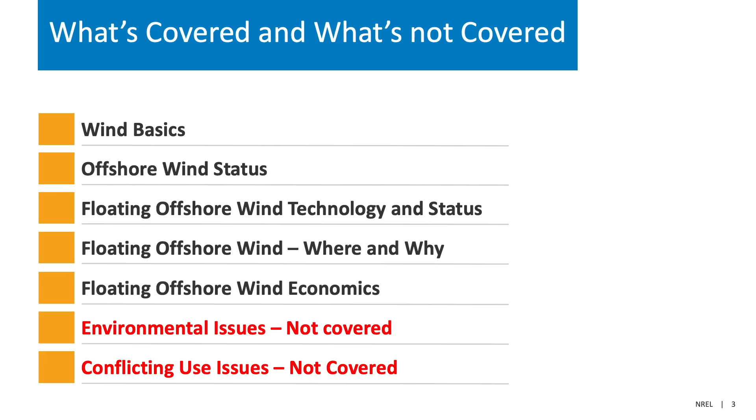I want to make sure everybody understands that I'm trying to speak to multiple audiences. I think the intent of this presentation is to reach people who may be familiar with wind power and possibly offshore wind, but maybe haven't seen much at all about floating wind. But if you're new to the field, there's some introductory material that I'm going to cover. And if you're new to the field of wind, there's a little bit of that, but I can't promise that some of the material might be passé. I skipped some of the introductory material just for the sake of time. But I'm considering this an overview of the new technology of floating, and we'll get right into it.

I just put my bio in there. I won't cover that. Tiffany did a great job just now, but if you want to go back to this, it'll be there. I've been working with floating concepts since I started the offshore wind program, but it's really just starting to take off now.

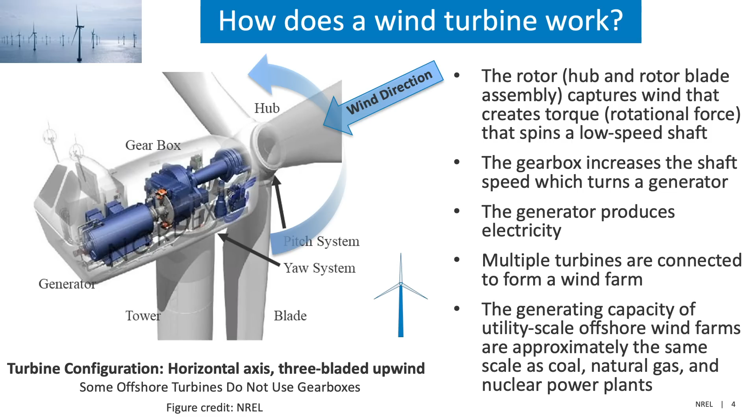I want to add, though, that offshore wind turbines sometimes have eliminated the gearbox. That's to reduce the part count. So you'll hear or see turbines that are called direct drive machines or direct drive generators. That means the low-speed shaft connects directly to the generator without a gearbox. Those require a lot of technology in the drivetrain system, but they're now becoming one of the main configurations used in offshore wind.

The first project in the United States was the 30 megawatt Block Island wind farm, shown in this figure. It's comprised of five 6 megawatt turbines that were originally Alstom machines, now called GE Haliade turbines, 6 megawatts each. It was installed in 2016 off of Block Island. To this date, this is the only offshore wind farm in the United States.

The wind plant is shown in the picture, especially the one to the right, in relationship to where it is in Block Island. These turbines can provide enough power for up to 16,000 homes in Rhode Island. But if you look at the island of Block Island, there aren't 16,000 homes there, so most of this power is used on the mainland. When they built this wind farm, a cable was brought to the mainland shore of Rhode Island, coming ashore at Narragansett, and it powers the homes in that region.

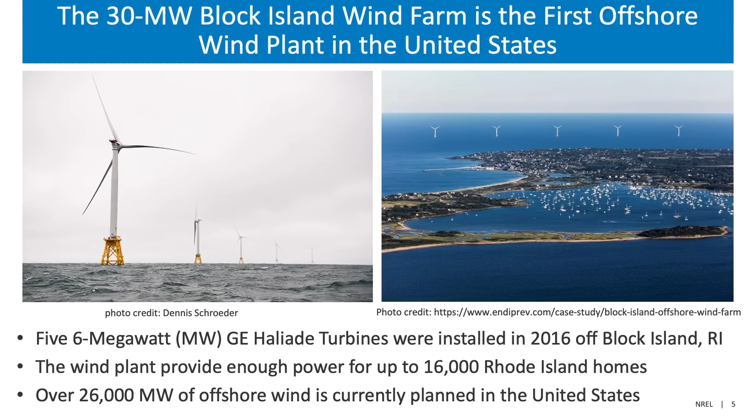So this is a very small wind farm. It was the first one, and it's still operating, of course. But there's now over 26,000 megawatts of offshore wind currently planned in the United States. This includes, depending on how you look at it, the regulatory lens through the leasing system, or the policy lens, where states have committed specifically to build offshore wind power in their region. A lot of this is happening on the East Coast, but it's starting to spread into other areas where we might see floating wind, and this is a floating wind presentation, which I'll get to in just a minute.

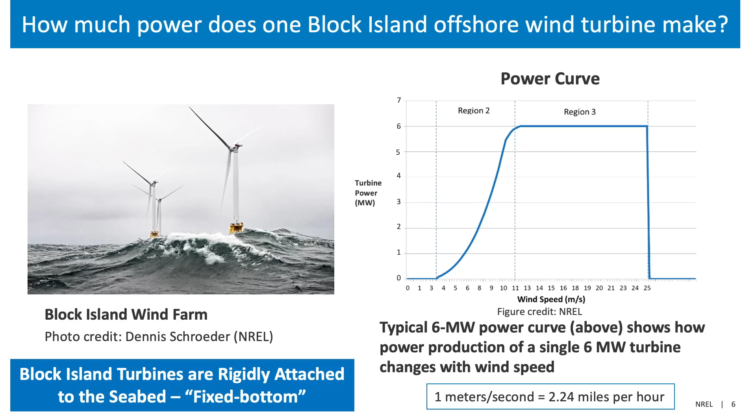The fixed bottom machines that we use are a lot the same as land-based machines actually, but they're bigger and have much more complex support structures that have to be installed out in the ocean. They're designed to withstand the harsh conditions of the marine environment, like corrosion, and they have to be maintained in that environment as well.

The floating turbines look similar, but the big difference is that they're supported from the bottom by buoyant substructures. Those are moored to the seabed, so they're floating, but they're moored through cables and lines that connect to anchor systems.

Before I move on, I want to clear up a couple things about terminology because people get confused when I refer to the support structures, which some people call the foundations. The substructure is actually a part of the support structure, the part that the platform is attached to. The support structure includes the platform, as well as all the mooring lines and the anchor system. Some people might call that the foundation, but the foundation is really just the part that attaches it to the ground. Hopefully that terminology will help as we go forward, but I'm using the terminology that the engineers use to design these.

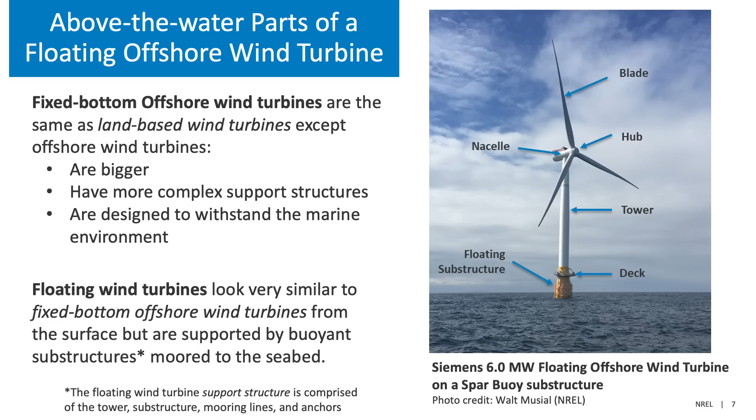So when we're talking about the platform itself, it's the substructure, and the whole thing is called the support structure, which includes the tower, by the way.

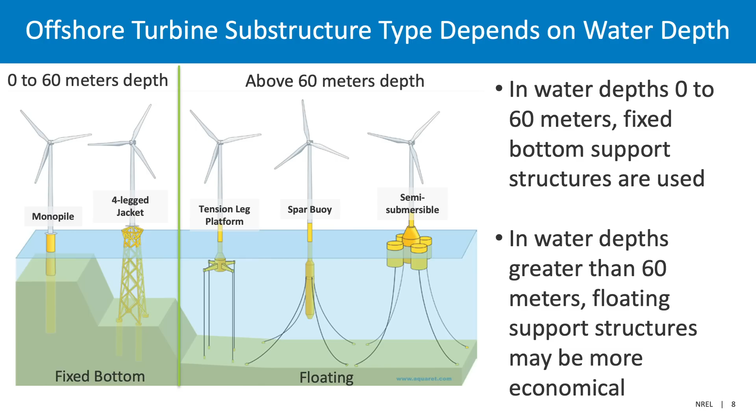Below the waterline, these are artistic views of different types of foundations, different types of substructures. There's the monopile, which is the most common, and then there's the four-legged jacket, which is the kind of substructure that you saw in the Rhode Island, Block Island pictures. And then beyond that are these floating systems, which I'm going to spend more time talking about in just a minute.

Looking at this same picture on the right, if you just stick to the fixed bottom systems, there's 27,000 megawatts installed globally in the fixed bottom type. Of the floating type, there's only 82 megawatts, so 0.3% of the total installed capacity is floating. We're just getting started, people. That's what this slide is really telling you, and we're excited about the floating industry.

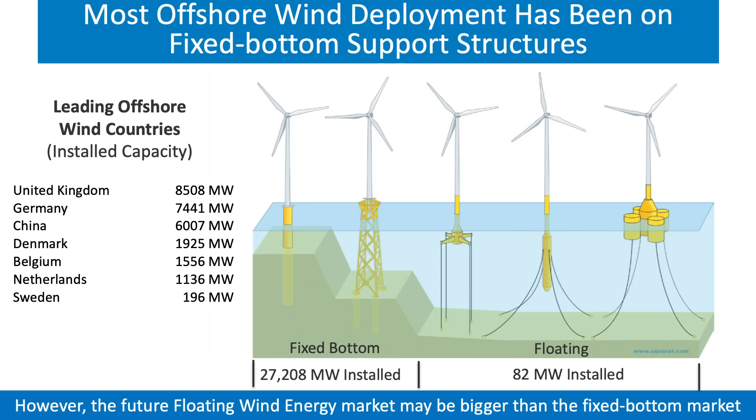The established fixed bottom industry is already going, and I included a few of the leading countries that have installed over a certain number of megawatts. These are the top 7 countries in the world that have installed capacity of offshore wind, but this is all fixed bottom technology. For floating, we're just getting started.

So why are we excited about this? It's because 80% of the offshore wind resources in the world that could be feasibly developed are greater than 60 meters, which points to this technology. If we use floating technology, we'll be enabling sites that are further from shore, more out of sight than the fixed bottom systems, and they tend to have better winds. So the economics and the feasibility of floating is in our favor in a lot of these areas.

We're already starting. We already have 82 megawatts installed, but a lot of that is just starting to accelerate right now. We expect that we'll see floating technology at the utility scale, and by that I mean 600 megawatts to 1,000 megawatts per project by the year 2024. That's only 4 or 5 years away.

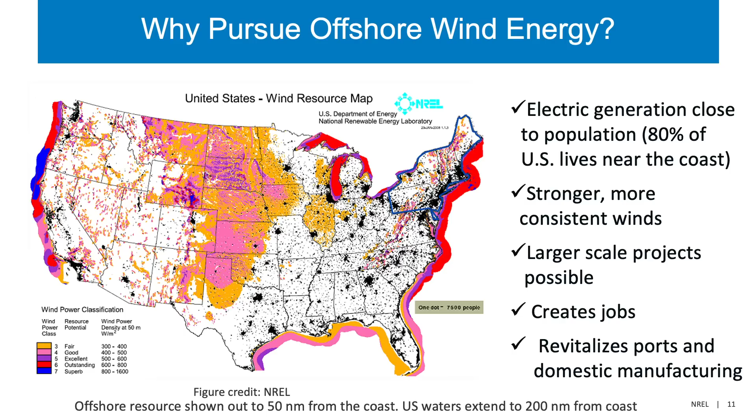By developing this industry, we're going to create a lot of jobs, and I have some targets on that at the end. It's already revitalizing a lot of the port and coastal manufacturing supply chains that were dormant from the loss of some of the shipping industry and other things that have happened over the years. But some of those facilities do exist, and we'll be upgrading them.

Now, you've got another resource map. This is the one we actually use, and it's based on wind speed. The darker red colors represent the higher wind speeds. The best sites are obviously where the wind speeds are the strongest, but also where the water is not too deep. So even with floating wind, we don't want to exceed certain depth limits, or at least we're basing our resource assessments on a certain depth limit. And we've set these technology filters to do that.

So this map is only showing you wind resources in areas where the water depths are less than 1,000 meters deep, and where the wind speeds are greater than 7 meters per second in velocity. There's a few conversions there in case you like to speak in miles per hour or knots: 7 meters per second is 15.7 miles per hour and 13.6 knots.

So given these assumptions, the U.S. wind potential is approximately 2 times greater than the U.S. electric energy use. So there's a lot of resource there, and offshore wind can contribute a lot to our total generation portfolio. Of course, it's not the only thing we'll rely on, but especially in coastal communities, we can use it to supplement renewable power.

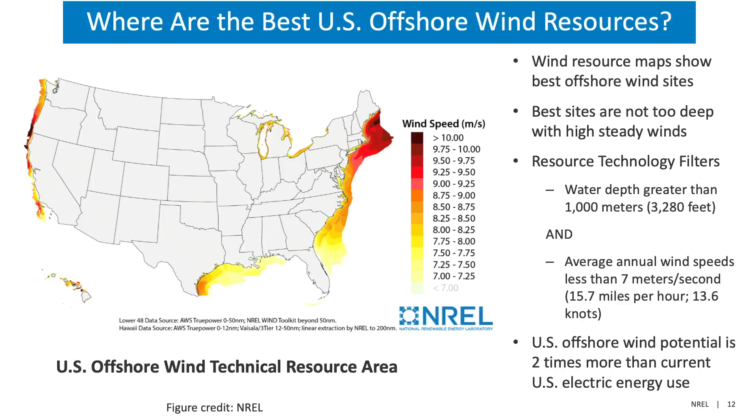I don't have a lot on regulatory, but I do want to show what's happening, and most of this is in the fixed bottom industry. These are maps that cover the regulatory activity in the United States, and most people in the U.S. might recognize that I've sliced out the East Coast, the West Coast, and Hawaii here. There's very active leasing going on through the Bureau of Ocean Energy Management, which has regulatory authority over the outer continental shelf, which extends from 3 nautical miles to 200 nautical miles.

And over the last approximately 8 years, they have granted 15 lease areas in the United States, which gives the developers who own them exclusive site control of up to 25 gigawatts of development capacity. That's what we typically refer to as the regulatory pipeline. We also have the policy pipeline, which is about the same, maybe a little bit more now.

BOEM has also identified 13 call areas. A call area is a potential wind energy area that's under public review. It might become a wind energy area, or it might not, or it might change in scope or dimensions. We don't know yet, but we haven't counted the call areas in the regulatory pipeline up to this date. There's also another category, unsolicited projects, which are applications for additional projects that BOEM has received. For any reason, a developer can submit an application for a project, but it does still have to go through a regulatory process that includes some attention to whether there's competitive interest in that area.

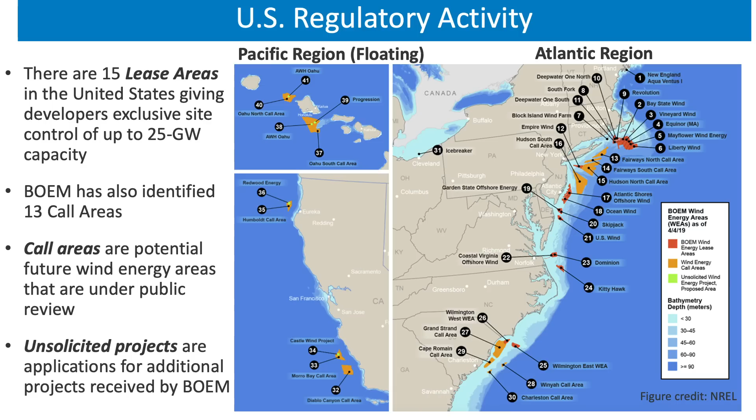I don't have a lot more on the regulatory side, but that's something maybe for another topic. So in the United States, we have areas where floating might be considered, and this map was drawn in a different way, based on our bathymetry. There are 2 colors here: a light kind of aqua color, and a dark blue. The light color indicates areas where our cost techno-economic models predict that fixed bottom technology will be superior.

The dark blue indicates areas where the models indicate that floating might be superior, and you can see there's many areas where floating technology might make more sense. Of course these boundaries can change as technology changes, but you can see that if you get north of Boston, north of Massachusetts, the shallow water goes away. If you're on the West Coast, there's virtually no shallow water unless it's really close to shore. And in Hawaii, I'd say the same thing.

The Great Lakes might stand out as having no deep water, but that's not the case. When we did the resource assessment, we eliminated all the deep water because at the time, deep water was considered unfeasible for the technology in the Great Lakes, since ice flows and freeze overs in the winter could potentially prevent the current technology from being successful year round. There's been a lot of talk about reassessing that position, and the technology for deep water in those conditions is considered possible by many people.

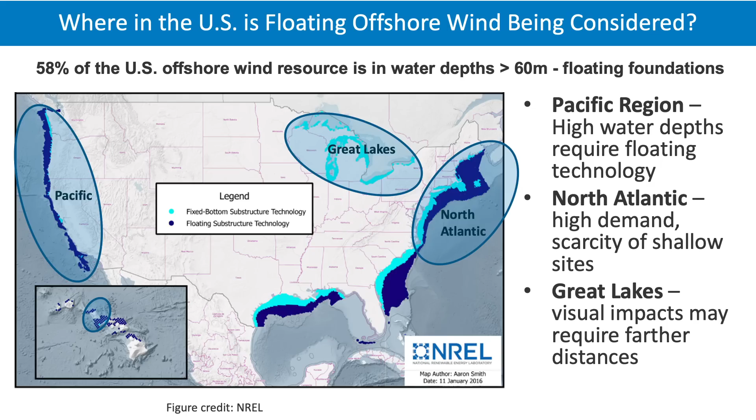There's likely to be a push toward floating because visual impacts may require further distances, especially in populated areas. So those are the areas we're looking at. There's certainly arguments for the South Atlantic and the Gulf of Mexico, but both of those regions have lots of shallow water.

From the technology standpoint, we're leaning heavily on the oil and gas experience that helped accelerate the first generation of floating wind turbine prototypes. We're past that point now and moving toward a pilot stage. The basic substructures that were used were derived from the oil and gas industry, but we're finding that the criteria we use to design an oil rig, if used alone, can result in safe and successful designs, but they can be bulky and expensive.

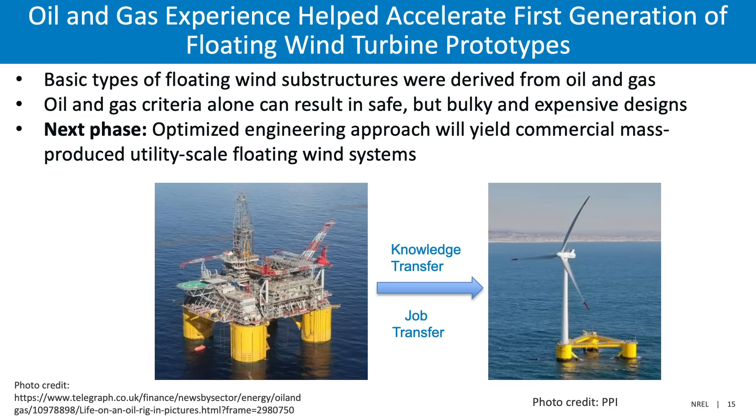So the next phase is likely to be an optimized engineering approach, which could yield commercial mass-produced utility scale systems. We're seeing that right now, and there's a lot of knowledge transfer and job transfer coming in from the oil industry. You'll see that the oil industry is heavily involved in the early phases of the offshore industry, because a lot of those skills transfer directly.

So the characteristics of the basic floating platform types are as follows. You can see this illustration of three different types. They relate to three platform types that get their static stability through different methods. One is a spar, which has a deep draft but achieves its stability through ballast weights installed very low. The semi-submersible is a low draft system with a wide footprint on the water plane where it distributes its buoyancy, and this is challenged by high exposures to waves and structure above the waterline, because a lot of the steel has to be right at the waterline.

For a tension leg platform, shown on the far right, it achieves static stability through mooring line tension, with a submerged buoyancy tank. These can be the lightest weight systems, but the problem is they're unstable until you hook up the mooring lines. They also have very high vertical load mooring line capacity - the anchors have to pull up at about 10 times the force of the spars or the semi-submersibles.

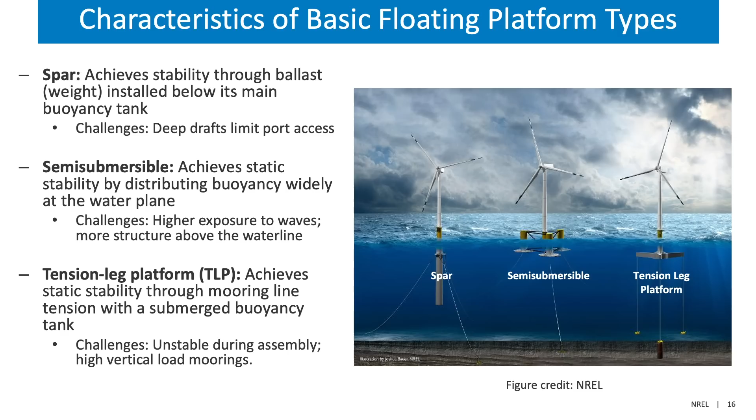So they all have challenges, and we're finding that as the industry evolves and works toward optimization, these challenges can be mitigated by hybrids of the various systems, and we're seeing that.

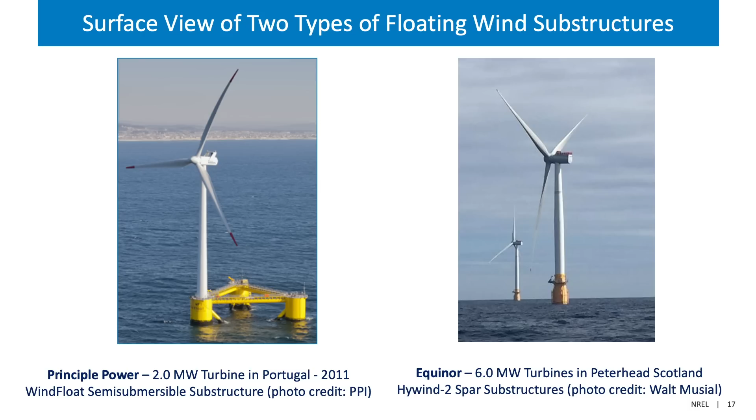From a surface view, there are two types of platforms shown here - one's a semi-submersible and one's the spar - shown just so you can visualize what they look like from the top. You can tell the semi-submersible because you can see the structure. With the spar, not so much.

So if you look at this illustration, it shows some of the other pieces now. I'm going to focus on the non-turbine equipment. We already talked about floating substructures, and the dynamic array cables connecting the turbines create a lot of the infrastructure and cost of the system.

Then there's the mooring and anchor systems that connect the platforms to the bottom, and the installation assembly, which isn't shown in the drawing, but this is the equipment that has to be deployed to install all these, both in the harbors and out at sea. Then there's the substations, both offshore and onshore, the export cable that connects between them, and costs associated with decommissioning that happens 25 to 30 years after they're installed, since that's their expected design life.

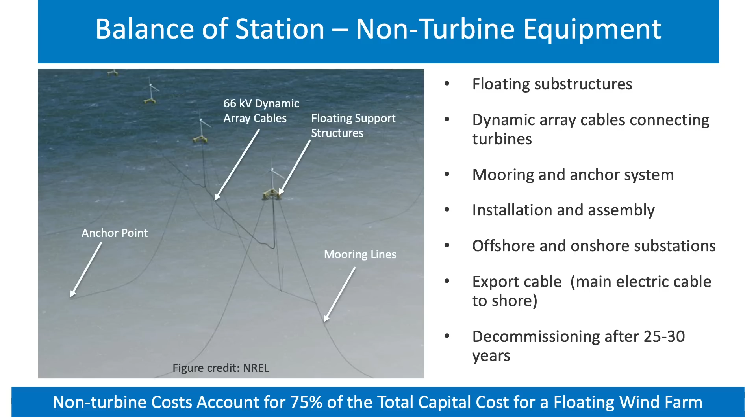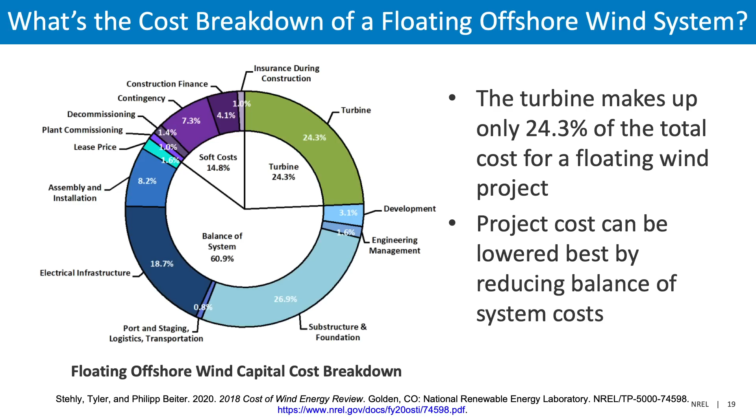So about 75% of that capital cost goes into the non-turbine cost. This figure shows the breakdown of how those capital costs are distributed, and you can see only about 25% of the cost goes to the turbine. The rest is made up of the substructure, electric infrastructure, assembly and installation, insurance, and so on. Focusing on that bigger part of the pie is the best way to lower the system or project cost if we're looking ahead to reduce costs.

So I'm going to go through some parts of the wind farm we already talked about, for a better technical understanding. The first is the mooring line and anchor configuration systems. There are several different types of anchors, and I've only shown the drag and embedment anchors here, but these mooring lines come down from the system and connect to the seabed.

This is shown at a fairly high depth, showing a kind of hybrid mooring line where you have synthetic mooring line at the top, which doesn't have much weight to it, and a chain mooring, which is how a lot of these platforms stabilize, because they use the weight of the chain mooring to draw the system down and stabilize it. This is one configuration, but it's an example of how it might look.

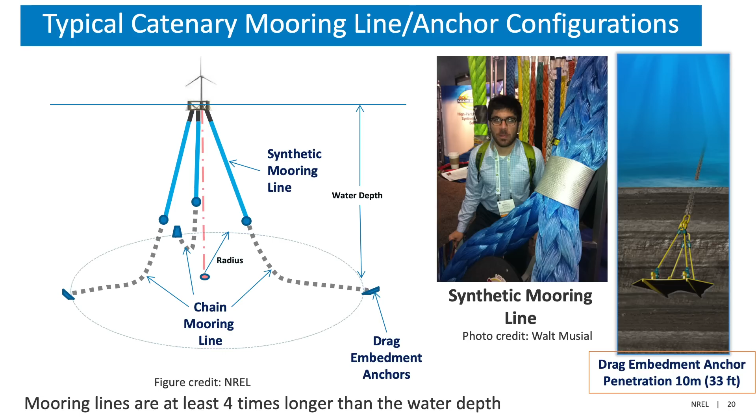For those wondering what those lines look like, I put in my colleague Marco standing next to a synthetic mooring line, and you can see how big the diameter is. They're huge lines, and this is how we keep the platform from moving around.

Now, if we go to the electrical side, these are additional cables that carry the electricity. All of these dots represent turbines. They're connected together, and they all aggregate at a substation. From that substation, an export cable brings the power to an onshore substation through fairly high capacity subsea cables. The array cables are smaller, but still big, with voltages of 66 kilovolts.

This is a new innovation that allows us to lower the cost of the wind plants. The electric cable costs increase as turbine spacing increases and decrease with turbine size, because with fewer or larger turbines, you need to connect fewer turbines, and the cable costs go down. But the exact spacing of these turbines is really a trade-off between wake losses that happen between the turbines and array cable costs. The larger the spacing, the more cable you need and the more expensive it gets, but you have less energy losses.

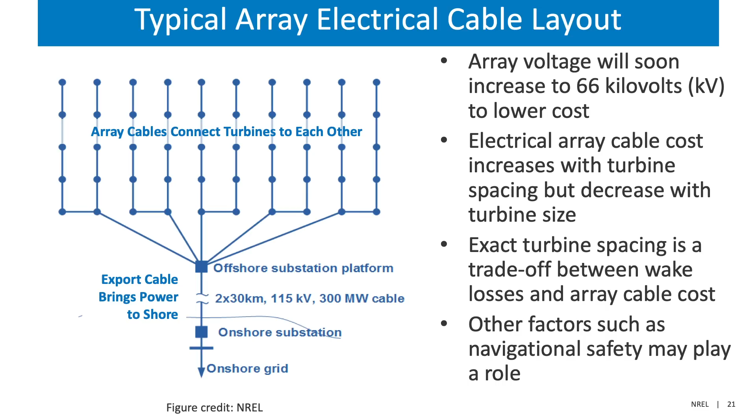Other factors could also play a role, such as navigational safety, which has been brought up in some negotiations earlier among projects going in on the East Coast. This is something that needs to be discussed, but it's not really part of this discussion here.

I do want to touch on how turbine spacing is determined and how it might change as projects get bigger. Turbine spacing is based on the rotor diameter, which is the diameter the blades sweep as they turn around. One rotor diameter on a big GE machine is 220 meters, but to create adequate spacing, the machines have to be somewhere between 6 and 8 diameters apart. I've seen projects as low as 4 diameters, maybe up to 10, but typically in between.

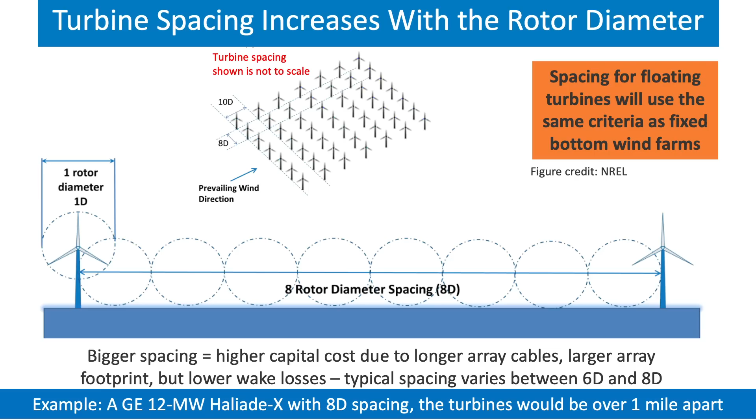I guess that's all I'll say about that, except for the fact that when we go from these fixed bottom arrays to floating, we're going to use the same criteria and the same physics results. There's some advantages we can talk about, but I'm probably not going to get to that today.

Another thing I want to talk about in this next slide is the watch circle. That's really accounting for the fact that these turbines can drift within their station, because the mooring lines have some slack, and as the wind blows, the upwind side becomes more taut and the downwind side becomes more slack, as shown in the figure, and they drift around in a circle. Well, how big will that circle be?

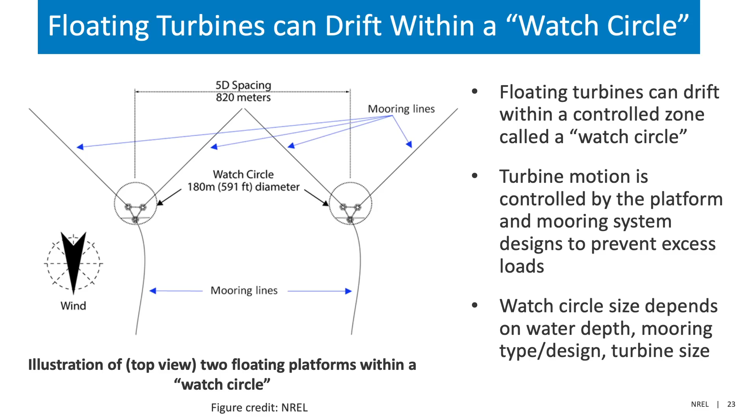It really depends on the design. It depends on how long the mooring lines are, the water depth, the design of the mooring system, and also the turbine size. So you can appreciate that the turbines aren't necessarily exactly fixed in space. They can move in actually 6 degrees of freedom as they're anchored to the sea bottom. That can affect some things, but generally the platform's job is to control that motion and make sure the turbines are protected from excessive wave action and things that might damage them or cause additional fatigue.

So all these turbines have dynamic array cables. That means the turbines and platforms are moving, and we have to protect that power cable from bending and breaking because of those motions. So there's all kinds of protection systems involved in the dynamic array cable to protect the static part of the power cable from seeing all those deflections and motions. They help isolate the cable from those platform motions.

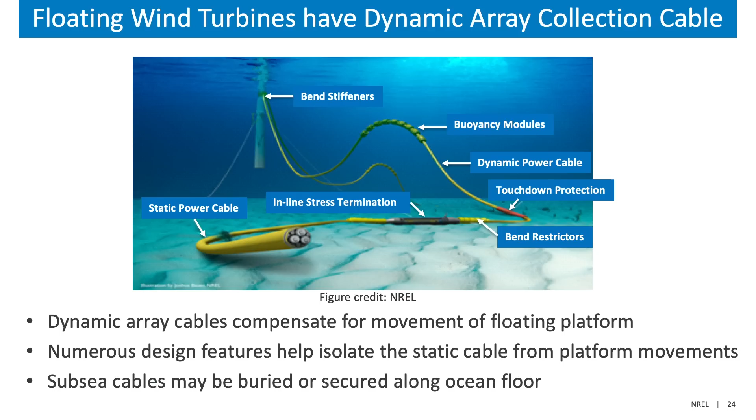And then those subsea cables can be buried, which they typically are for fixed bottom systems, or if it's really deep, they may just be secured with a mattressing system or some other means. And that's part of the design.

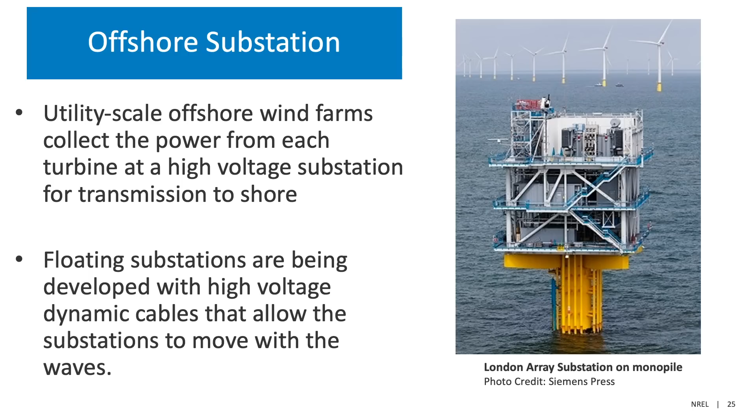They all connect to a substation. Now, I don't have a picture of a floating substation because I don't think there is one that has been built yet. But we're working on the same concept as this one. This is one from the London Array, and it's a fixed bottom substation, but chances are it will look very similar to this, except it will have dynamic array cables attached to it. These are under development right now.

A big part of floating and a big difference between floating offshore wind and fixed bottom offshore wind are the port and infrastructure requirements. We envision that floating systems will be mostly assembled and constructed at quayside or at a wharf facility, meaning a lot of the assembly and commissioning will happen there too. That's a good thing because it will avoid a lot of the labor at sea, which is very expensive and can be more dangerous than labor conducted in the harbor.

So we need wharf facilities that are adequate, and they need to probably be upgraded or built from existing ones. We need a navigation channel and wet storage that will allow the tow out of a system with the drafts being designed. And most of the platforms designed so far are semi-submersibles because they gravitate toward low draft systems that are easily towed out.

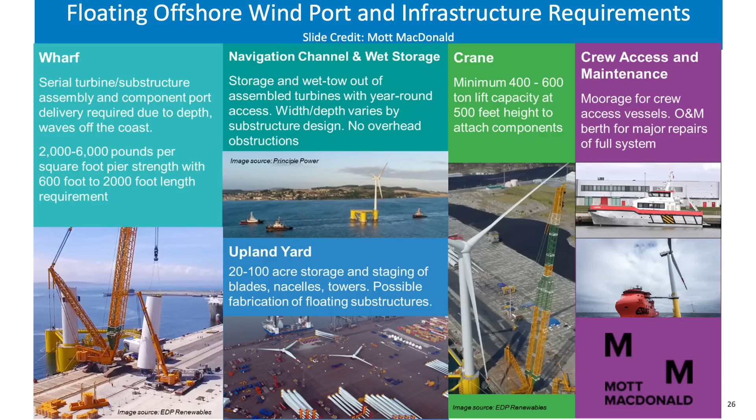We need an upland yard for laydown, storage and staging of the parts. We need cranes that have very high capacities, not just in how much they can lift, but how high they can go. And then the crews and access for maintenance don't have to be co-located in the manufacturing ports, and they don't have the same restrictions. A lot of these assembly ports need to have no overhead obstructions, such as bridges, so the whole assembly can be towed out in one piece.

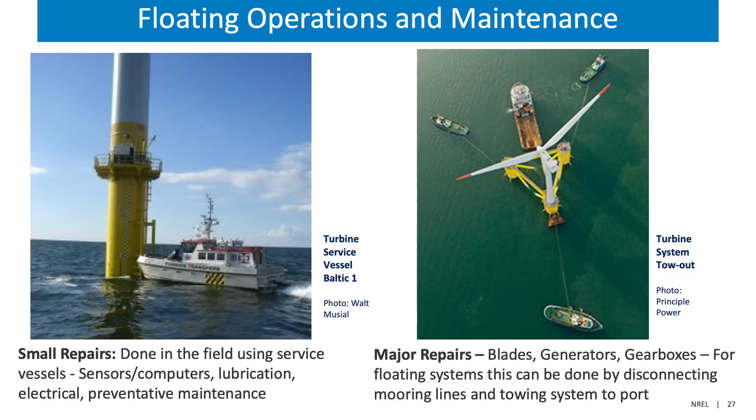So for floating operations and maintenance, there are two categories I've divided here. One is small repairs, where the turbine will be boarded directly by the maintenance crews through small ships. If it's a major repair, they can be disconnected from the mooring lines and towed into their construction or maintenance facility.

Most of these were very successful and produced the energy that they were expected to produce. But that phase is really over now, and we're really entering a pre-commercial phase, which began a while back.

There's about 14 projects totaling about 229 megawatts that are underway, already under construction, or have been approved, or are about to come online. That phase of pre-commercial installation is expected to be complete in the next 3 or 4 years.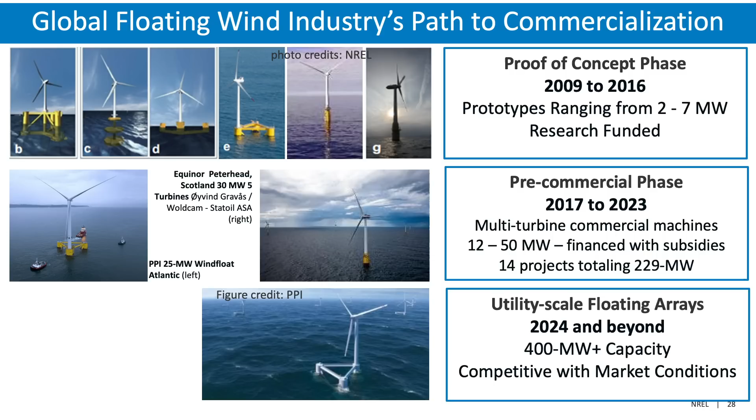Around 2024 is where we kind of see that happening. That's about the same time that we would expect competitive, cost competitive with market conditions. That's kind of the progression that's happening right now.

Leading some of this is what I mentioned earlier, these hybrid systems, which will be hybrids of the 3 archetypes shown in the earlier picture, where they overcome some of the shortcomings of the other platform types by combining features of different platforms. So what's needed, for example, is a low draft to enter typical port facilities, but a stable platform that can be deployed on station.

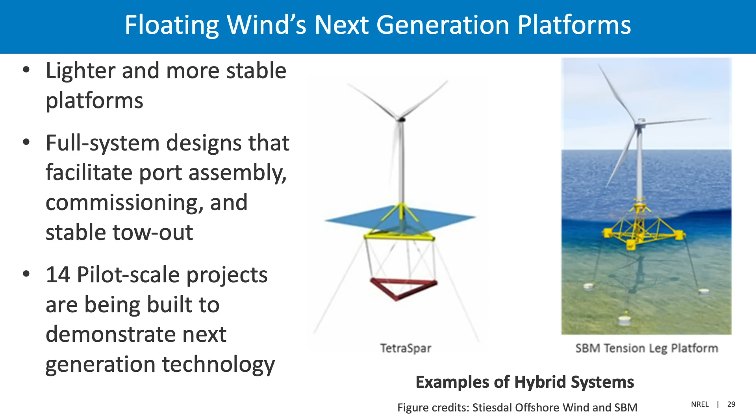Some of these concepts that I'm showing here are already in development and part of the pilot projects being deployed in Europe and around the world.

Here's a couple examples of these projects, and I don't want to spend a lot of time, but the first project was also Equinor, a 30 megawatt, 5-turbine project using Siemens turbines off of Peterhead, Scotland. There's a picture of one of the turbines from a boat.

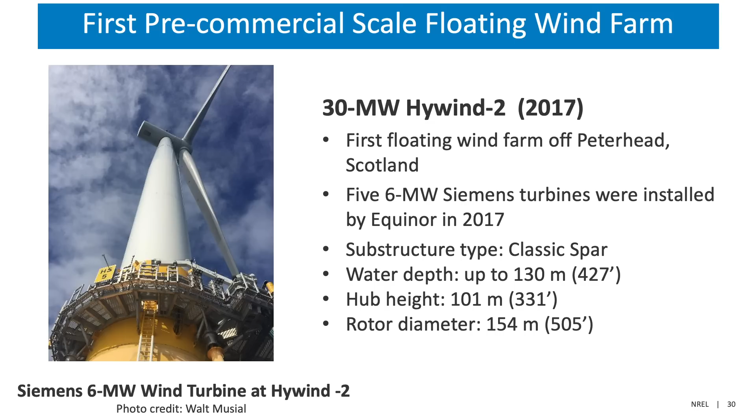This project is operating fantastically, as I understand it. It's achieving capacity factors that are higher than expected. It's doing really well. This is a brand new project, Windfloat Atlantic, that was just installed this year.

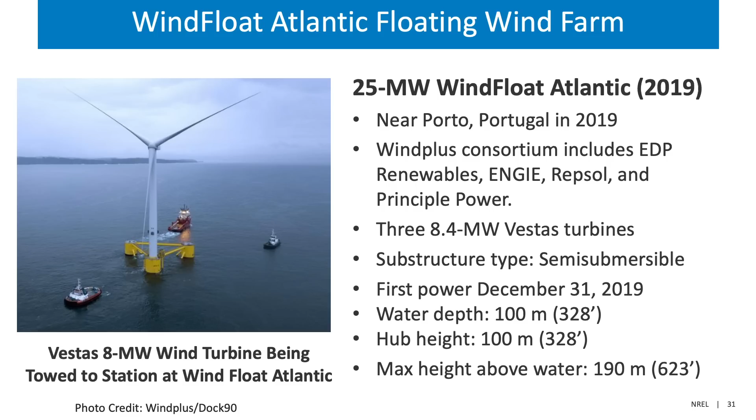They produced first power on December 31st. A 25 megawatt, 3-turbine project near Porto, Portugal. You can see this turbine being towed out to station. No heavy lift vessels necessary to get this on station. We're waiting anxiously to see how this one performs.

So now I want to talk about cost, and I want to make sure I don't run out of time doing it. So I'm trying not to rush here, but how do we predict the cost of a floating wind turbine, especially when the commercial systems haven't arrived yet?

So we've been working this question for many years now, and I'm going to try to explain in a few minutes just how that's done.

Only 82 megawatts of floating wind has been installed so far, and there have been no utility scale projects built. We've done some studies to show that at the pilot scale, about 1/10 the size of utility scale, the costs are at least 3 times higher than what we think the commercial costs will be.

This would be true for a fixed bottom system or a floating system. It just works out that way because there's a lot of fixed costs that you have to pay for whether the project is big or small.

So the cost estimates that we use to get us to the commercial scale costs of floating wind, we rely on the market data that we get for fixed bottom systems to validate our system. We also use

the U.S. power purchase agreements that are being negotiated now, and we do analysis on those to see if the European projects and the U.S. projects are in the same ballpark.

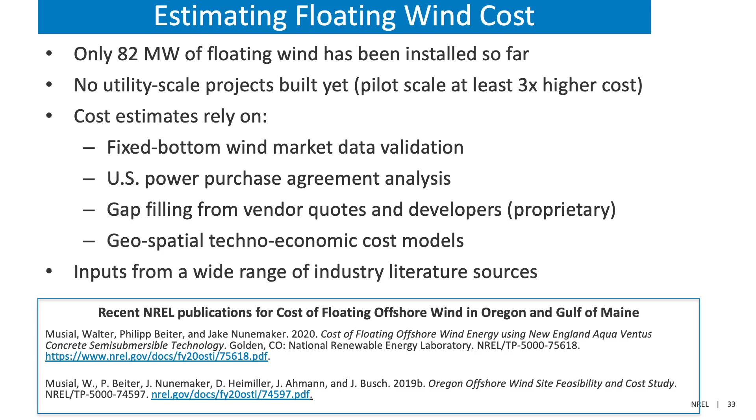If you want to read some of the publications we've done, I've included a couple recent ones. There's a report we wrote on cost modeling of floating offshore wind for the New England Aqua Ventus concrete semi-submersible, published this past January. And there's another report we did for Oregon, sponsored by BOEM, looking at the cost of offshore wind at feasible sites in the state of Oregon. You can access those online.

Here's what the auction prices in Europe have been doing over the last 5 years, and this is what's gotten people excited. These prices have come down very rapidly, about a 70% decline, and that's creating the motivation for a lot of the policy commitments based on the fact that cost and price are related. So why are these prices falling?

A big part is because technology is improving. Larger turbines are enabling some of the cost reductions. We're also seeing lower risk because supply chains are maturing and people are getting more comfortable with the operation of these projects, which are performing as they should. Through increased competition in the auction process, we're seeing competition among developers that helps bring these project costs down. There are other reasons these prices are falling, but those are the big ones.

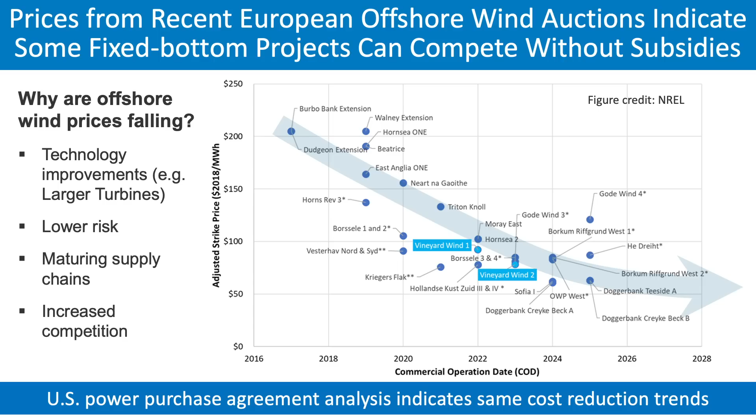When we compare power purchase agreements in our analysis for the early projects now coming online in the United States, we're not seeing a huge penalty between European prices and U.S. prices. You can see the Vineyard Wind analysis plotted on this curve, and it's right there in the middle of that data.

This is a simplification of what costs are doing and what our models have been showing. You can see that because fixed bottom and floating share supply chains, turbines, array and export cables, the regulations we use, and the port and infrastructure facilities to a large extent, along with O&M and maintenance, these can be synergistic with each other, and that's driving floating costs down along with the fixed bottom costs.

You can see in the bar chart that the models are suggesting we can hit—and this is not an NREL analysis, but the models suggest—5 cents per kilowatt hour for fixed bottom offshore is feasible globally by 2025. Some of these projects are coming in without subsidies right now.

So what does that mean for floating? In our models, by 2030, we think in a lot of the areas where we're deploying or want to deploy floating offshore wind, we can get to 6 cents per kilowatt hour, even below that if the wind regime is really high. So you can see there's a lag of about 5 to 7 years between the fixed and floating curves.

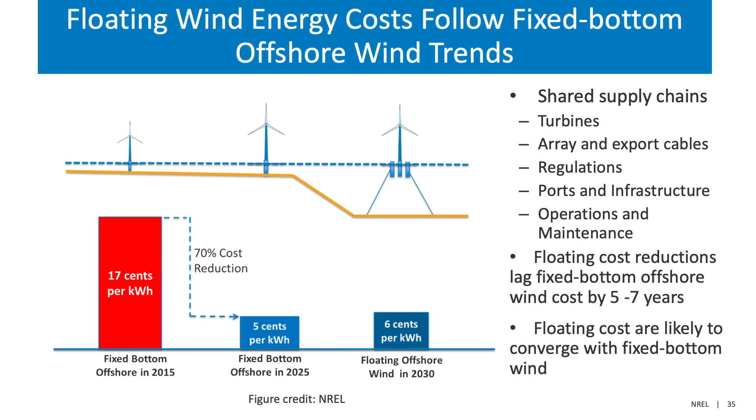But generally, there's nothing in the floating cost equation that would make floating more expensive. So we expect floating costs to converge with fixed bottom wind costs over time, and that will probably happen somewhere just after 2030, according to our models. But others might have more aggressive thinking about that—it's possible that could happen sooner.

We'll see. One of the things driving this is large turbines, so I wanted to get to that. This curve shows the expected growth of turbines. We have 12 megawatt turbines in development right now, and we expect turbines will get to 15 megawatts by 2030. That's about twice as big as land-based systems, probably even bigger than that—this is conservative.

This growth is being driven by a few different factors. Offshore, there are fewer installation and transportation constraints than on land, so we can do it. Larger turbines lower project costs, and we've seen and can demonstrate that, because it really lowers all the balance and substation costs incurred through array cables and O&M, and more energy is produced—that's reflected in the cost curves. Fewer turbines are also cheaper to maintain.

What we haven't seen is a hard limit to this turbine growth. But it does take a lot of technology advancement to move to a larger platform, so it takes time to progress through this. I'm not sure how large turbines will ultimately get, but we're pretty sure they'll reach 15 megawatts at some point.

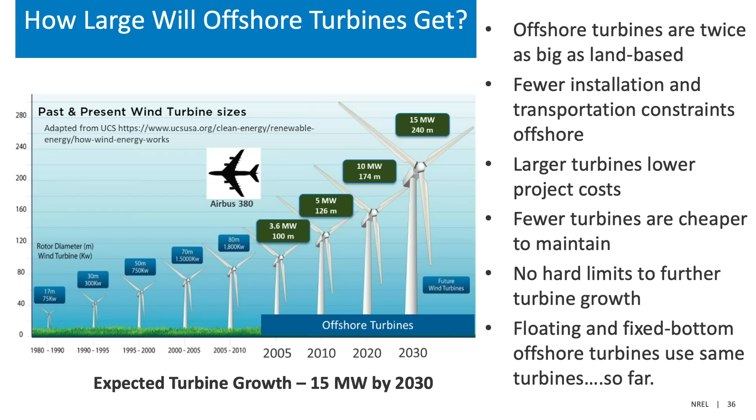What does that mean for floating? Right now, floating and fixed use the same turbines, but someday we may see optimization around the turbine itself, and that's yet to be seen.

Here are some photos courtesy of GE showing these larger turbines are real, and new technology is enabling these huge machines to be built. GE expects this will be commercially available by 2022. Siemens has announced larger machines too, on approximately the same timeframe. So we're going to see the offshore industry jump to these 10 to 12 megawatt turbines very soon.

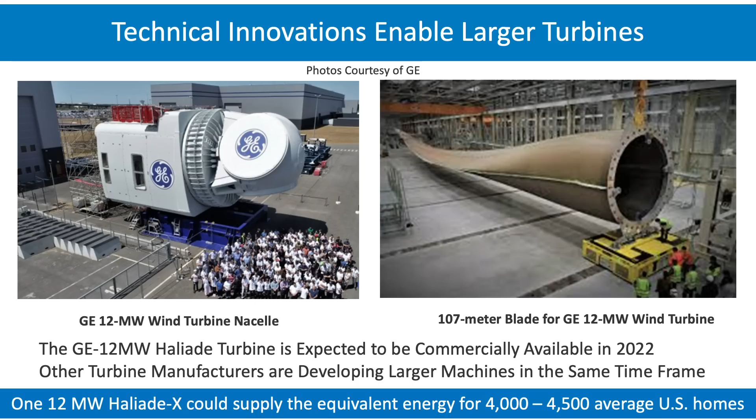For comparison, one of these 12 megawatt Haliade-X turbines could power 4,000 to 4,500 average U.S. homes, depending on the wind regime. They may even say more, but that's what I calculate, and that's quite a bit for one machine.

Finally, I want to talk about economic impacts associated with offshore wind. DOE did a study in 2015 that looked at offshore wind, and we estimated that about 80,000 full-time equivalent jobs would be created by 2030 by the offshore wind industry.

Economic benefits from jobs is certainly one thing, but there are other synergies that can help other renewables grow, like solar, which only creates energy when the sun is out. Wind can blow 24 hours around the clock, and sometimes at night wind is even stronger. So coupling offshore wind with solar might be a match that helps generate even more energy and helps offset the times when solar isn't able to produce power.

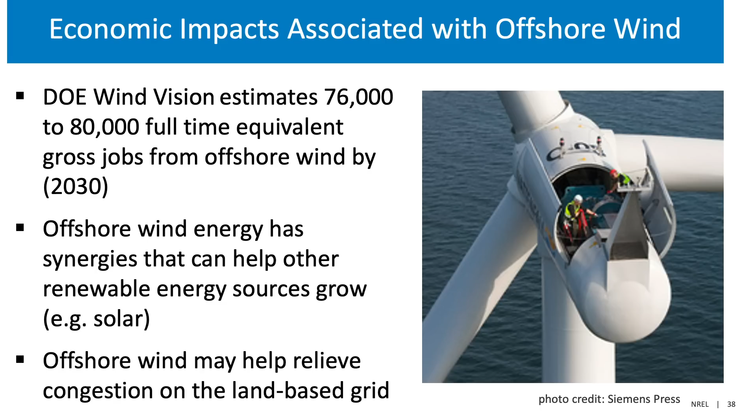Offshore wind's also putting power in on the low congestion side of the grid. Offshore wind transmission from the coast can offset congestion that's already building up on the land-based side of the grid. This has been shown in a couple of different studies, but more work really needs to be done in this area.

So key takeaways: I talked about the resources and showed that these resources are very close to population centers. That means we're going to generate power where the power is needed and where it's used. 80% of the global offshore wind resources in the world are suited for floating offshore wind. So floating could become a much larger part of the offshore wind industry than fixed bottom in the long term, simply because there's more resources for floating, more geographic areas for us to go to.

Floating offshore wind is expected to be deployed at the utility scale, up to a gigawatt scale project at a time, by 2024. We're seeing this happen right now, with a lot of planning actually going on. There's one project in Korea I could point to. So this is something that's happening.

The cost of fixed bottom offshore wind has decreased 70%. A lot of people may not have heard that, but it's now able to compete in some electricity markets without subsidies, as some European projects are showing. That may be true in this country someday as well.

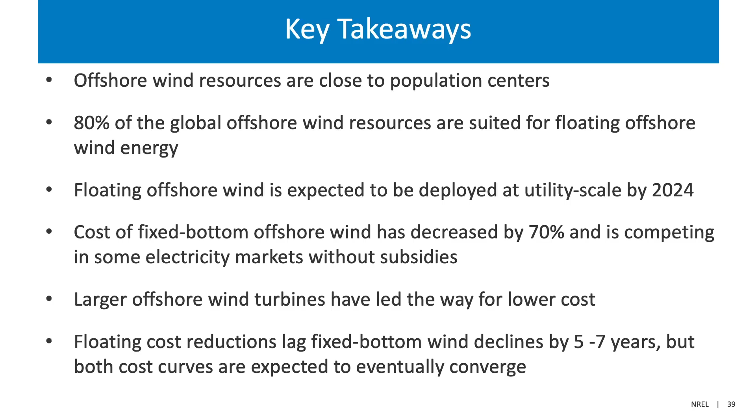We're also seeing that larger offshore wind turbines have led the way for lower costs, changing those balance of system costs and lowering them down so offshore wind can compete on the regular electricity market. Floating costs, because it's such a nascent industry, are lagging what's already happening in fixed bottom, and we think that lag will be about 5 to 7 years. But floating will eventually catch up, and the two curves will converge somewhere in the 5 cent or below per kilowatt hour range. So we expect both floating and fixed bottom offshore wind will be competitive with most forms of energy by 2030 or before.

And I think that's my last bit. So thanks for your attention.